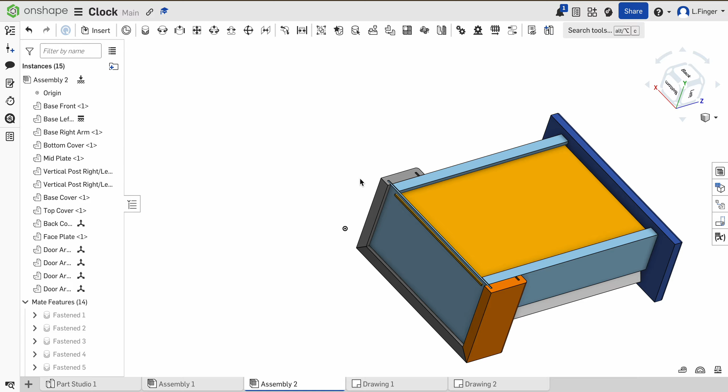Alright, here we go. This is the assembly tutorial for Onshape for our clock. We've already finished making all the parts and we're going to assemble it. There are a couple key things to remember: we need this back plate to slide, and we need the door to revolve or rotate. I'm going to show you how to do that, and then I'll show you how to turn it into a PDF and submit it for your points.

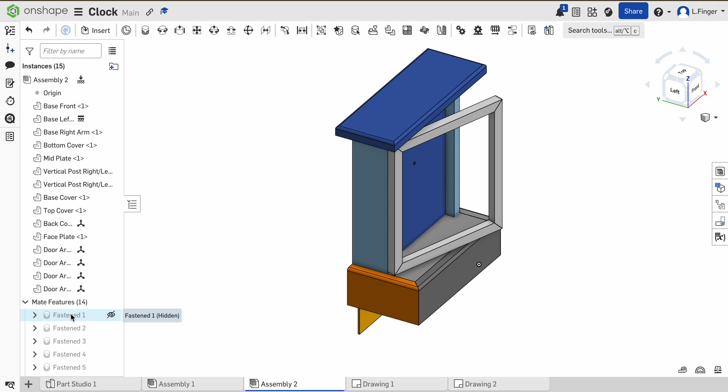Alright, let's go ahead and begin. I'm going to start with a new assembly. You should already have an assembly default made, but I'm going to create a new one. So here we go, assembly 3, a blank workspace.

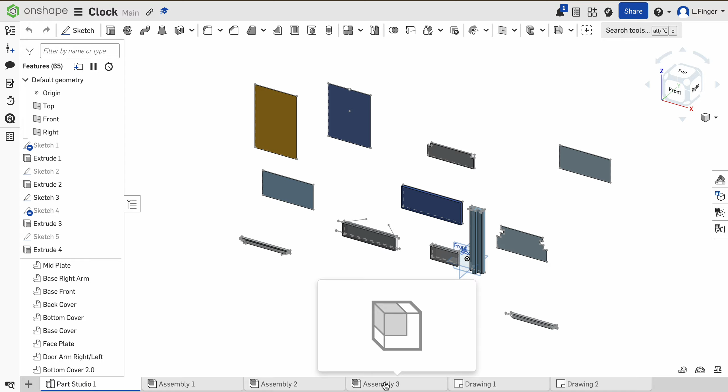What's nice about the assembly versus the part studio is that you're able to insert as many parts as you create, and you can fix them, fasten them together, and then they will stay that way, versus the part studio where we just made each piece. Now you could have multiple part studios, so you could have a part studio for every one component. Then you could have an assembly, multiple assembly files, and then assemble those together. But what I'm trying to get at is we're just going to build it all at once right now with all of the created parts based on the instructions on Canvas.

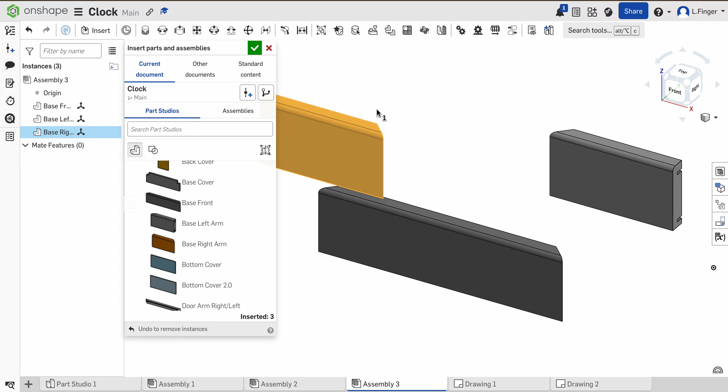So let's get into it. First step, assemble, insert. We're going to insert, let's start with our base front. So I click base front, bring it in, left arm, alright, let's put you there. Right arm, we'll put you there. Okay, a little slow. And then we're also going to do our mid plate.

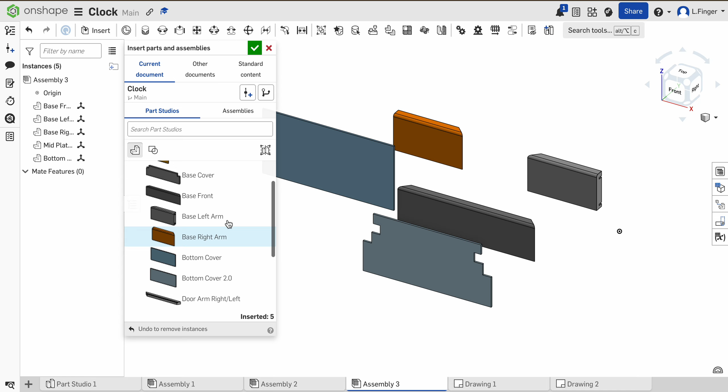There. And zoom out a little bit. After the mid plate, we're also going to need that bottom plate. So here's our bottom cover. I made a second one with a slightly different measurement, but I'll go ahead and use the original one. Let's see, that's probably good for now.

I mean, I'll put in the posts. I can always come back and insert more, but let's start with that. Hit OK, and there they are. They're in the assembly file. They're separate right now, but we're going to fix them together.

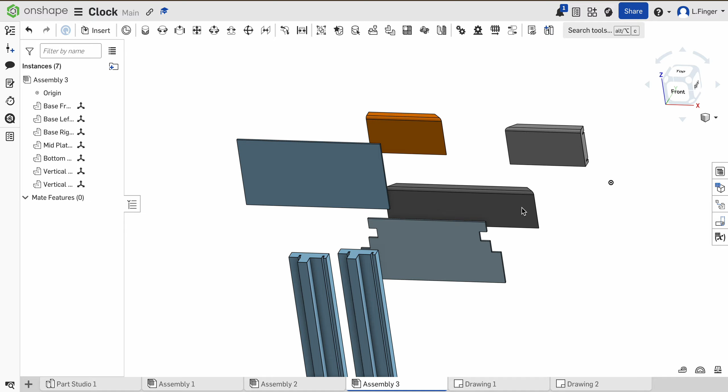So it's easiest to start with the base in this case. We're going to get the miters to line up. So here's one of the arms. This miter connects to this miter to create that 90-degree angle. Then we'll lock it in with these plates. Then we'll go with the posts.

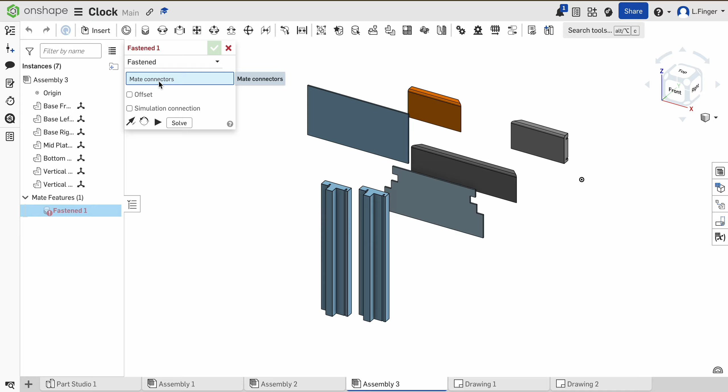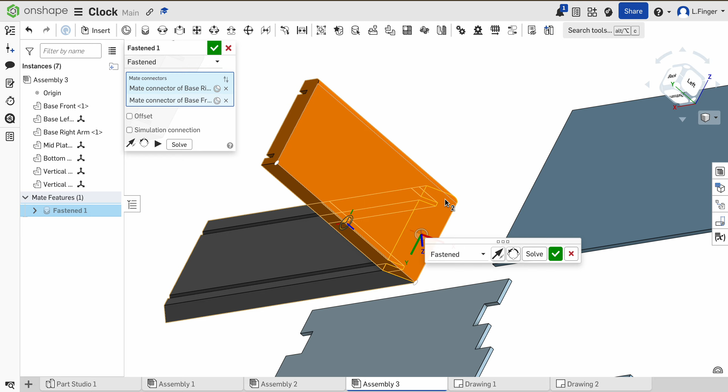So let's go ahead and click Fasten Mate. There's a couple different mates, M on your keyboard, but Fasten Mate is the one to use. Fasten. Now it's going to ask us to select two surfaces. Okay, first surface, let's just grab the very center here. It does allow you to grab edges and corners. I've noticed that if I grab this face right in the center and I click the next face right in the center...

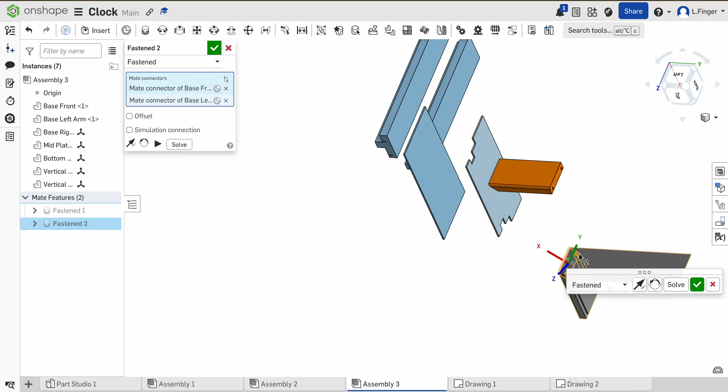...they should line up and get a nice tight miter. Okay, hit OK. I'm going to reset my view, and we're just going to do the next one. Here we go, grab this, zoom in, be real intentional from where you click. Okay, there we go, right in the center of that miter to the center of this miter, just like that. Now it moved everything just to show me what it could possibly look like. I'm going to go ahead and hit OK, and you can see that the whole assembly moved.

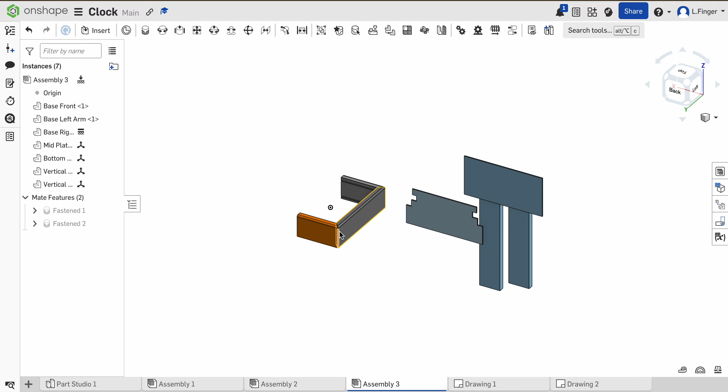This is still my origin. I don't want everything to move again on me. These are glued together, so what I'm going to do is just grab one of these pieces and fix it in place. So now everything will be moving to the base instead of the base moving to the object.

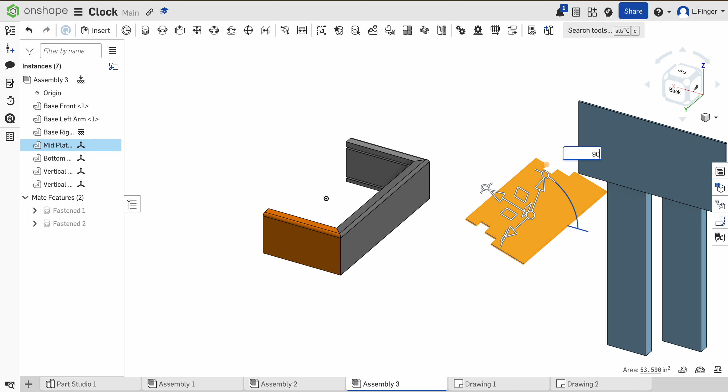Next step, we are going to grab our mid plate here, and I like to rotate it. I'll type in 90 here and rotate it the other direction, so it looks like it could just slide in. This just helps me assemble things when I can see how it's supposed to fit, and then I can use the correct mate after that.

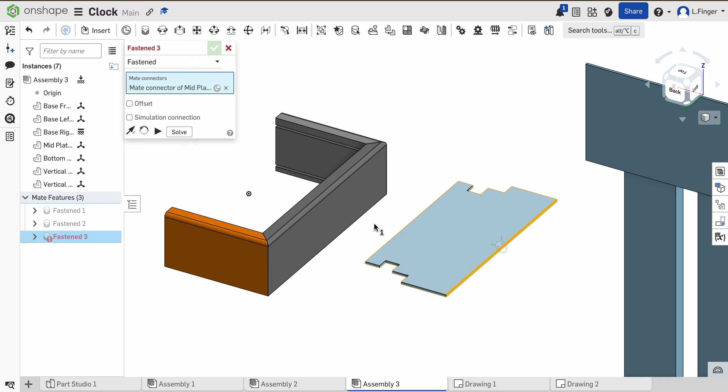Alright, so fasten mate, because we don't want this piece to move. I'm going to grab the top edge in this case. Now it's going to grab it right in the middle. There's my mate connector, and we're going to put it in the middle of our base in this groove.

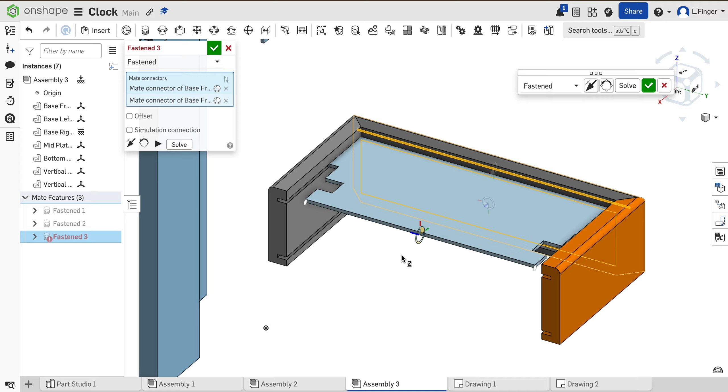Let's zoom out just a little bit. Two fingers, click, drag. See that corner in there? Top edge to top edge. Let's grab that. Before I hit OK, zoom out. Does it look correct? Yep, looks like it's in its groove. So we're going to hit OK.

Now we're going to do our next one. I'm going to hit X there, get out of my mate, grab this. You can drag it wherever you want. And like I said, I like to rotate it. So we need to rotate it this way and this way.

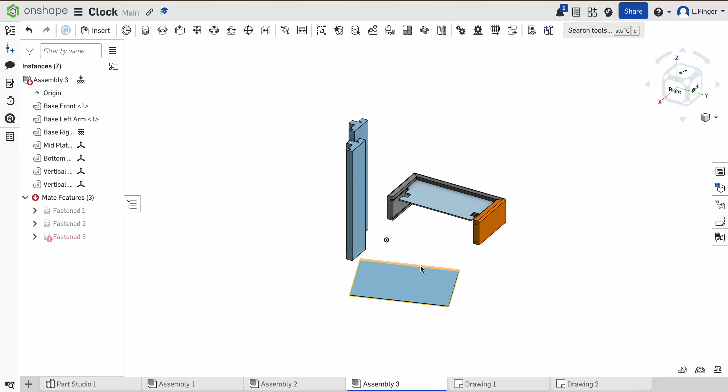Okay, that's how it's going to end up going in. So now I know what edge to grab. So fasten mate, top edge. Zoom in, let's grab this top edge in the back of the groove. Just like that. Good. Hit OK.

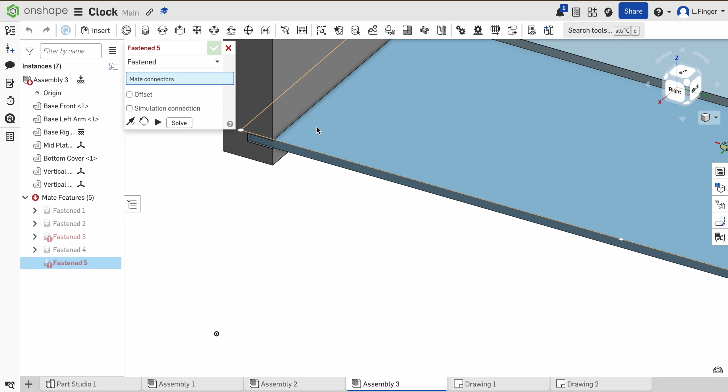Now, this bottom plate is the original size. I made a second one where it's a little bit shorter in width, so you can actually drop the back plate out of the clock and change the batteries. So we fixed that on the real project, not on the Onshape project, or the wood project. This is a real project too.

All right, let's get our posts done. Posts got to go in. The groove that is closer to the edge needs to go to the back. That's for that back plate to slide in and out of. This one, okay, so right here would need to be flipped.

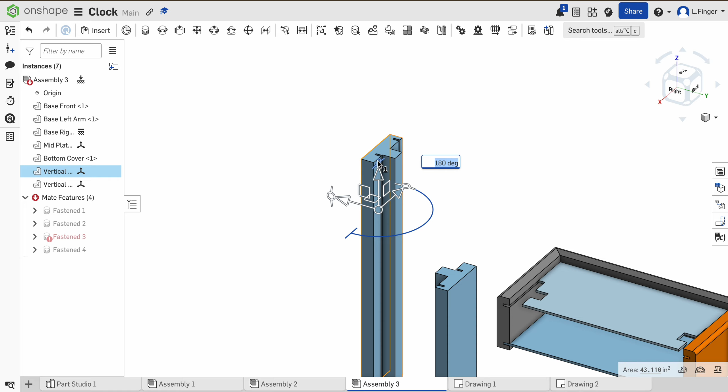So let's go ahead and flip it this direction. Okay, so let's see here. So it goes like that. Good. So 180. And then we're going to flip it the other direction. 180. And there it is. Back groove should line up with the next back groove.

Here's what I'm going to do now. I'm going to grab, you guessed it, fasten mate, and we're going to get the edge of this face flush with the edge of this face. And we need the bottom of the post to be on top of this board. There's multiple ways to assemble this, but I found that you could just grab this little corner here.

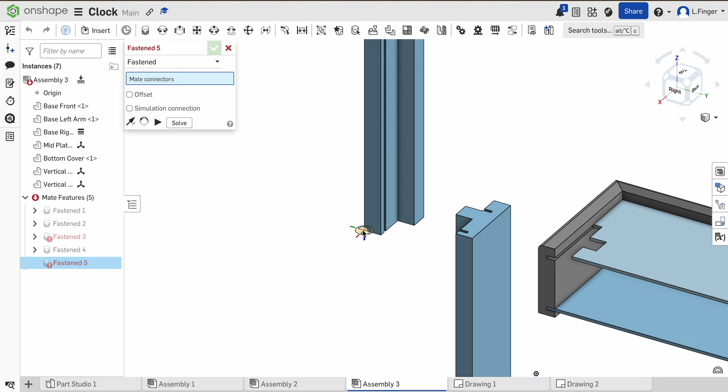Corner to corner. Right there. And it's going to fasten that corner together. Hit OK. That one's done.

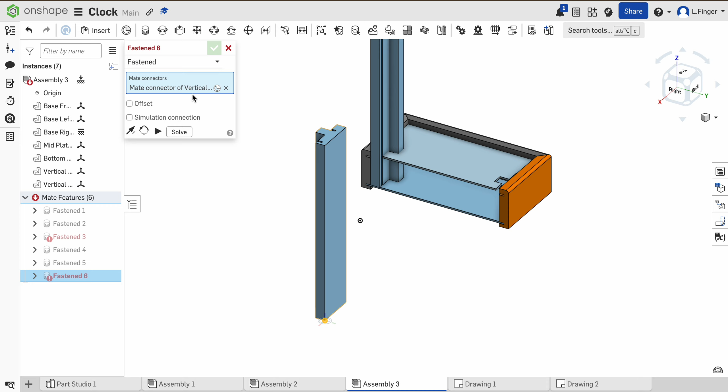Okay, zoom in again, let's grab the next one. Oh, I'm already in it. This corner. Okay, I got that mate on that right-left post to the base. Right, that corner. There it is. Hit OK.

See how the top plate has clearance for that groove? This bottom one does not. So we would have to cut that down.

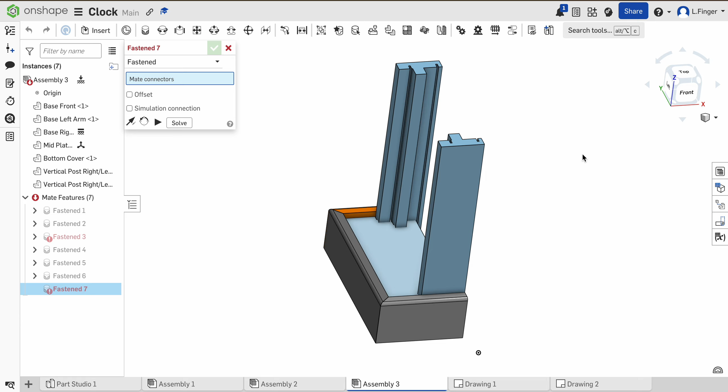All right, our posts are now assembled. What is next is to grab more components to insert. So we're going to insert more components. We might as well do the back cover. We'll do the base cover.

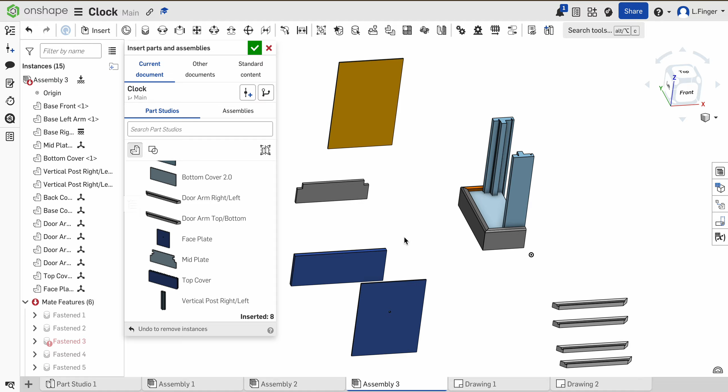Let's get the door, right and left arm in, the door top and bottom in. We'll get the top cover in, and we'll get the faceplate in, and that should be the rest of the components. All right, hit OK.

Let's start with our cover. This cover here, okay, I'm going to go ahead and just rotate it real fast. It's not like the rotates have to be perfect, but it's going to have to slide in sort of like so. That's going to help me determine what to grab.

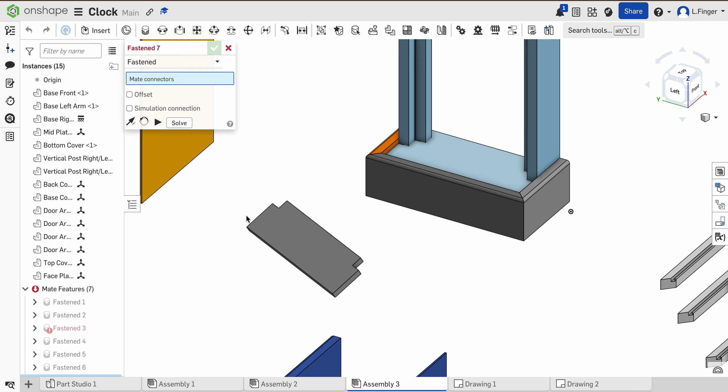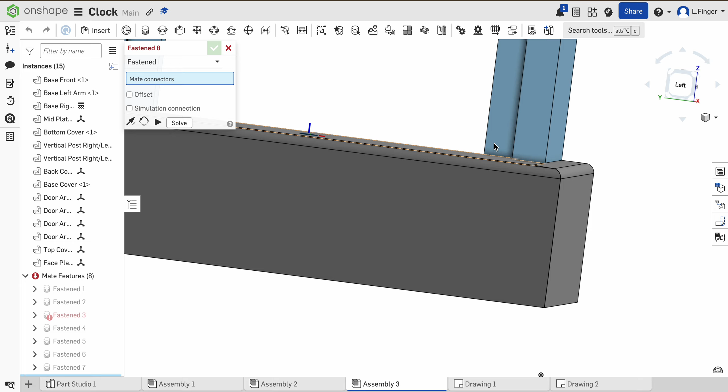I'm just going to grab this bottom edge right there, and we're going to fix it to this bottom edge right there. Okay, there it is, it's inserted. Nice tight fit. You can see that the top of the cover is flush with the base.

Zoom out. Time to do the next one. Let's do this faceplate. This faceplate is going to get locked in. You can see there's a hole for the clock mechanism. We're going to just grab an edge there. Now it's grabbing the middle.

I might need to change it up and grab a corner here. So let's hit X on that. If I grab this corner right there, okay, it's creating the mate connector. So I'm grabbing the corner.

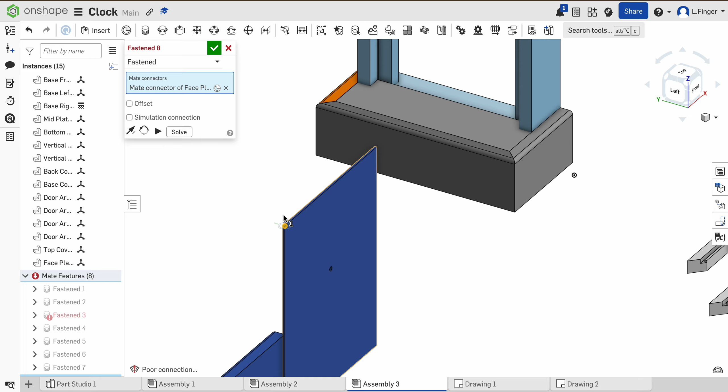Let's go ahead back to our clock, and we're going to stuff it right in the front against this corner. Now let's see if we did this right. I'm trying something a little new here. Corner to corner. All right, you can see that it is not in the position we think it should be. So let's rotate it.

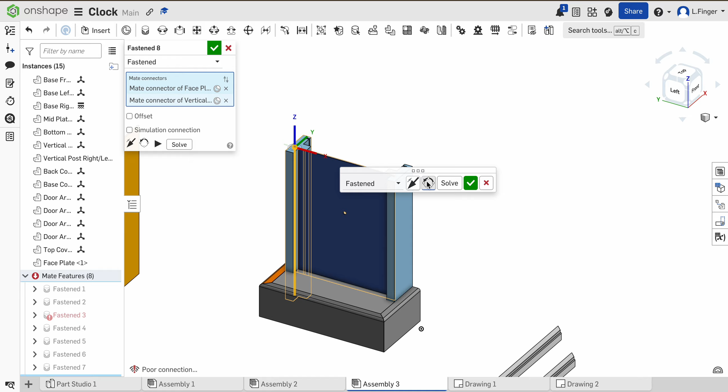Okay, if it's not in the groove, we'll have to flip it. So it looks like it is not in the groove. If we flip it and rotate it, oh, that's not going to look good either. So looks like I grabbed the wrong corner.

Now there's a way that we can kind of just fudge it. You see the X, Y, and the Z here. We can offset it, and currently it is off in the Y direction. So let's just type in -1. All right, -1 inch, that is way too much. We need this plate to be in the groove. How about 0.1?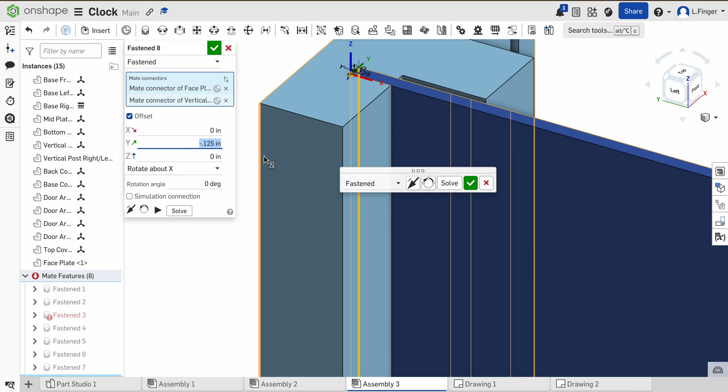Close, there's still a little bit of interference there. 0.125, there it is, the width of the bit. It fits. So there's the front plate.

The next plate is going to have to go in the back. Now this plate is the one that needs to slide, so we're going to use our different type of fasten. Slider mate - slider mate allows the component to slide on the mate connectors you select. So we want to slide up and down the groove.

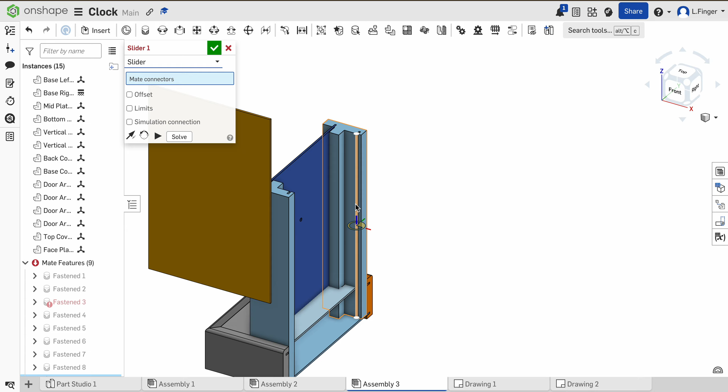Well, that would mean it's going to slide on this edge. So let's grab the edge. Did I get it? Yep, mate connector of back cover. Let's throw it in the groove. Now I grabbed that back corner.

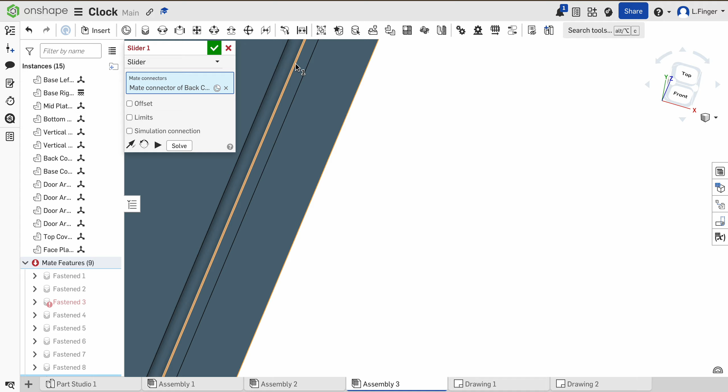So let's think about this. I think it has to go into this back corner. Right there, zoom out - is it in the correct spot? I don't think so. Let's go ahead and rotate. That's better. Hit OK, and let's give her a test.

So looking at our instances over here, these are all of our parts. Here's our mate features. Slider - let's go ahead and hit X. We got our slider 1. It should slide up and down the groove. Okay, let's keep that flush on the top.

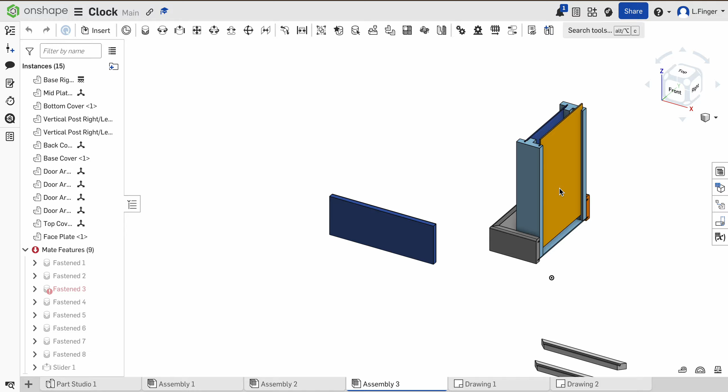We're going to add our next one, the top cover. This component here should have a round over. The round over needs to be facing up. Let's go ahead and grab it, click it, drag it, rotate it, flip it over. Good enough.

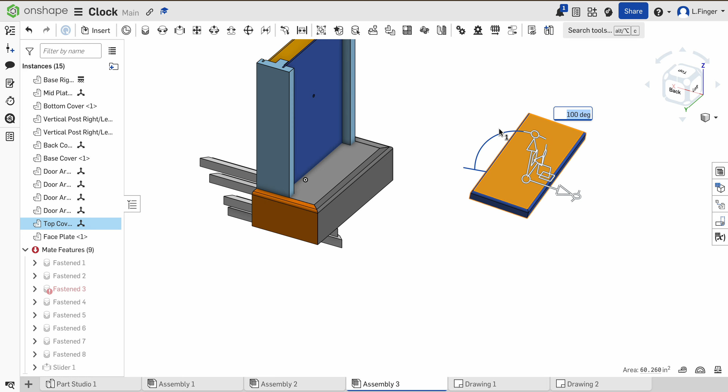Okay, now I have it rounded on all sides. It is actually an aesthetic choice that you guys can make on what you want to round. Doesn't have to be round over, doesn't have to be every side. But when I go to put this on, we're going to use fasten mate, as we don't want this component removable. We can grab any edge we really want.

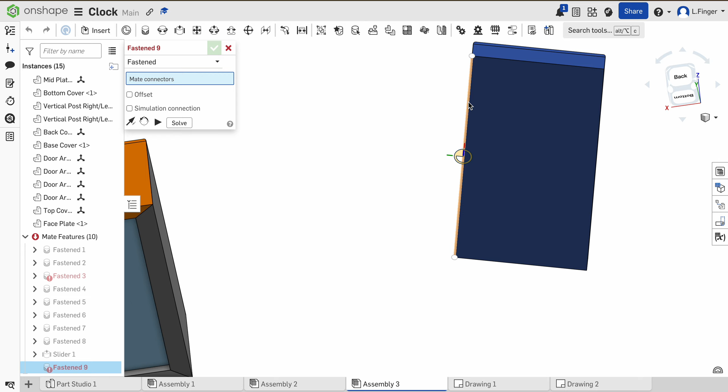I'm just going to grab this back edge - okay, the bottom corner edge. Zoom out, bring it on over, and I'm just going to select this edge right there. Now you can see it is not mounted in the spot we like.

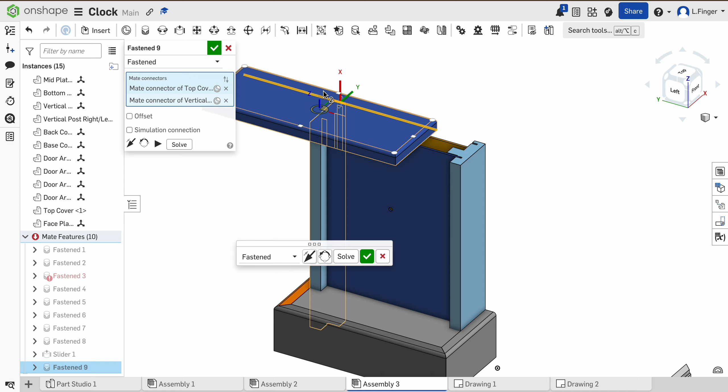We're going to use the offset tool to correct it. So there's our Z, X, Y. We're going to have to go -Z and +Y. So let's start with offset. Type in -3, okay, not enough. I'm looking for kind of symmetry here. -4, no, -5, that's looking pretty good.

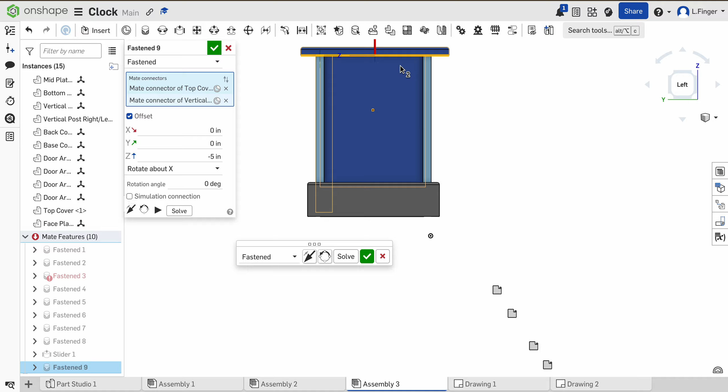You can see that it's a little off, so we could pause this for a minute. Oh, don't hit escape, that's going to cancel everything. Let's go ahead and refasten it.

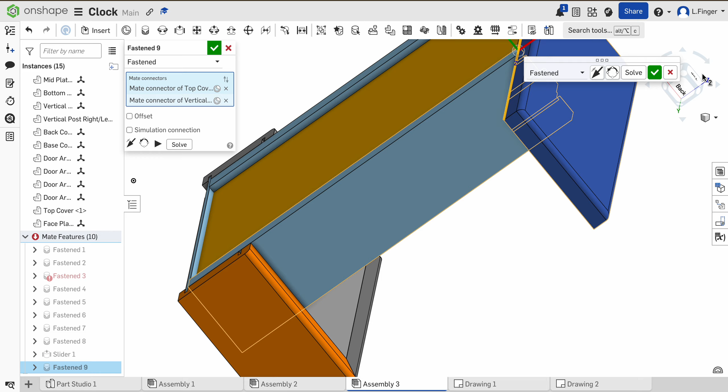Back edge to this back edge. Zoom out. Okay, offset, still negative Z in this case, negative 4.5. Hit left, see how the cap is slightly off? I'm gonna hit OK, we're gonna save it, we're gonna fix it.

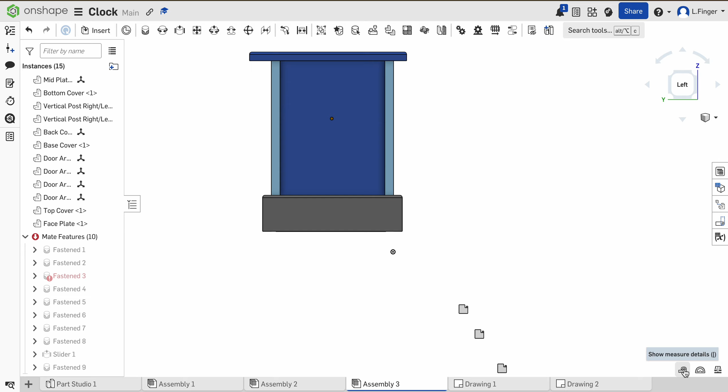There should be a measurement tool in here to figure out these parts. So if you hit X out of the mate connectors, here is some measurement tools, and you should be able to grab this edge, this face, to this edge, and the distance happens to be - let's see here - looks like we're going to go off of the green one there. It looks to be from one face to the other face.

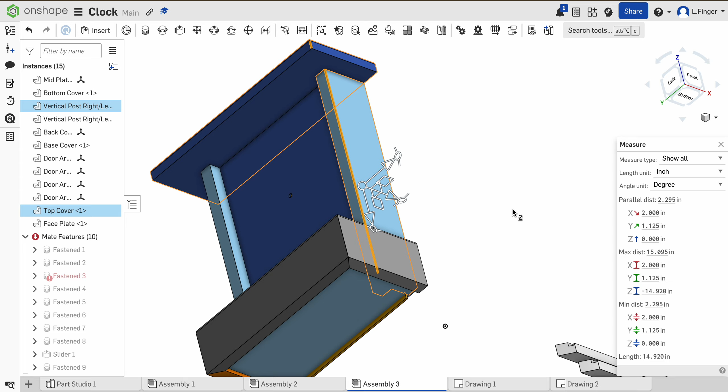1.125. Alright, if we click back off here, and we're going to click this face to this face, this one happens to be negative 1.875. So we could subtract those and meet in the middle. So we're going to have to move over just a little bit more. We could add those up and then divide them. So I'm just going to do a quick math here.

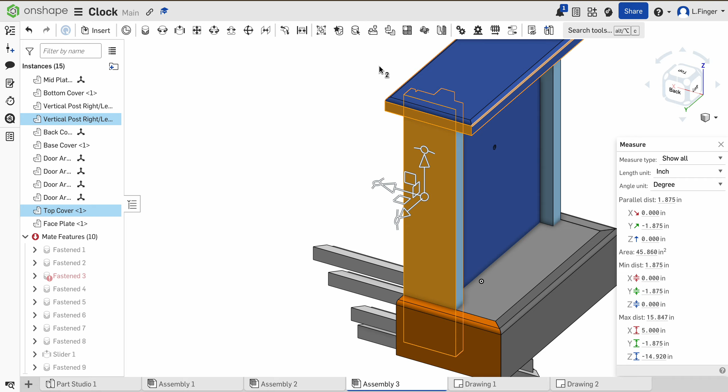So 0.625 divided by 2, let's see here. Scroll back down into our mate connectors. Let's go ahead and hit fasten.

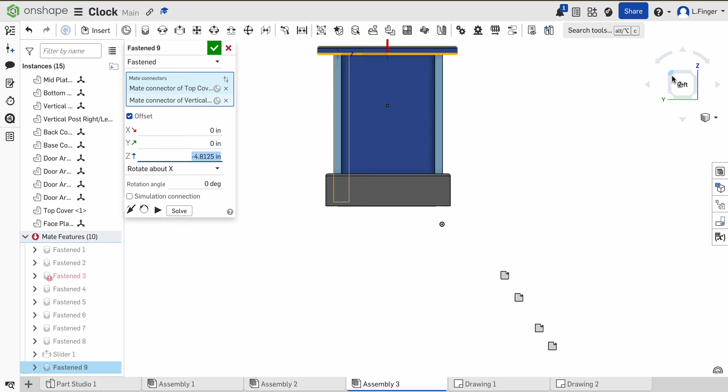And we're going to have to add a little bit here. So we're going to add 0.3125. Hit OK. And split the difference. So now it looks perfectly in the center. Now the next step's up to you. If you think it doesn't look good completely flush to the back, you could send the Y direction maybe a ½ inch and give it a little lip on the back. Okay. There it is. That's the cap using the offset feature.

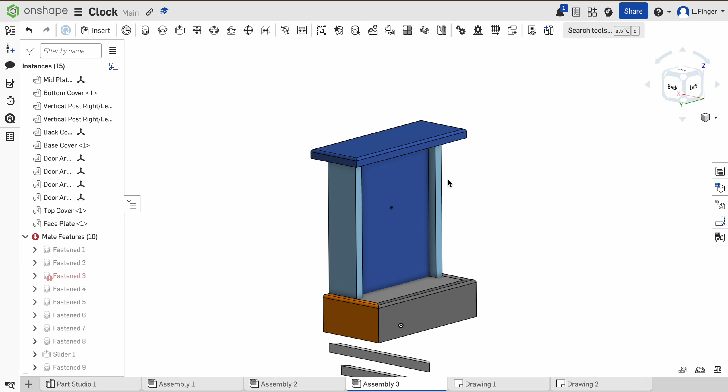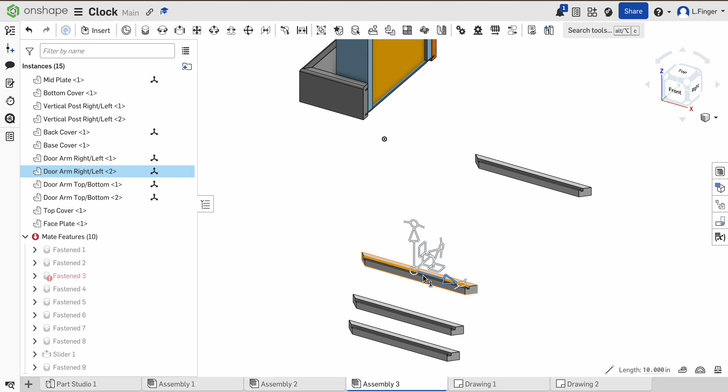The next step is to build the door. And then with the door, we're going to want it to revolve. So let's go ahead and assemble it. Now, when I did this in class, I ended up gluing the right arm to the left arm, which shouldn't be the case. It has to go every other. So this is door arm left right, so that's going to have to go about here. Let's go ahead and rotate it.

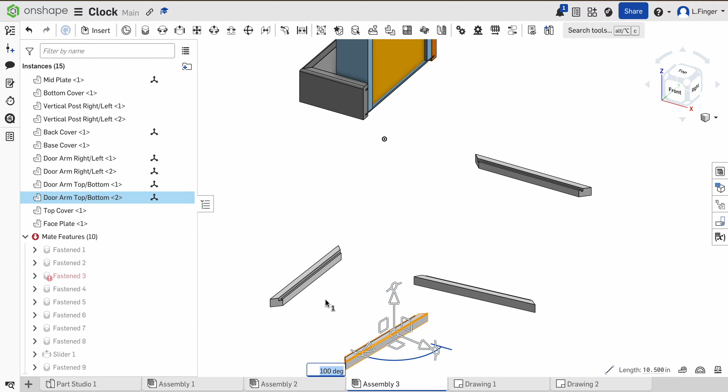This arm needs to be in between, so let's go ahead and rotate this one like so, and this last one needs to rotate the other way. Each one of these arms has a groove, a little slot there. That's for the glass pane to sit. This square stock here is going to be glued on after the fact to hold in that glass pane. This needs to face in on the clock so you don't see it. Alright, let's go ahead and assemble these.

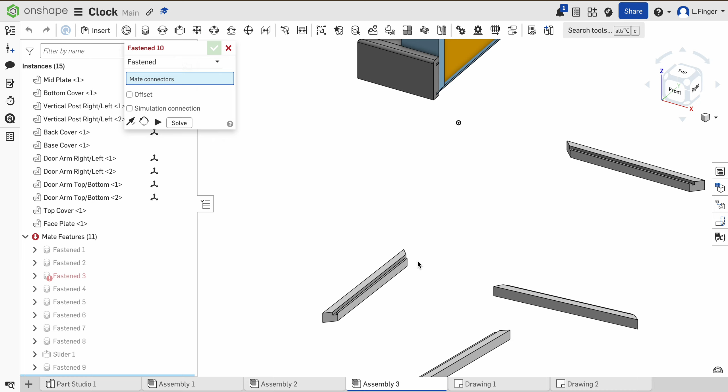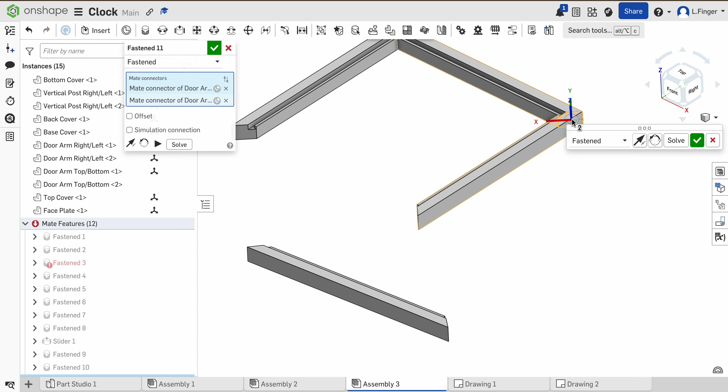Mate connector. We are going to grab this face, just like we were doing our miters earlier, right in the center. We're going to glue center to center. Do our grooves line up? Yes, they do. Let's hit OK. Okay, reset our view. Next one is this guy. This face to this face. Go ahead and hit OK. Lastly, this face to this face. Just like so. Hit OK.

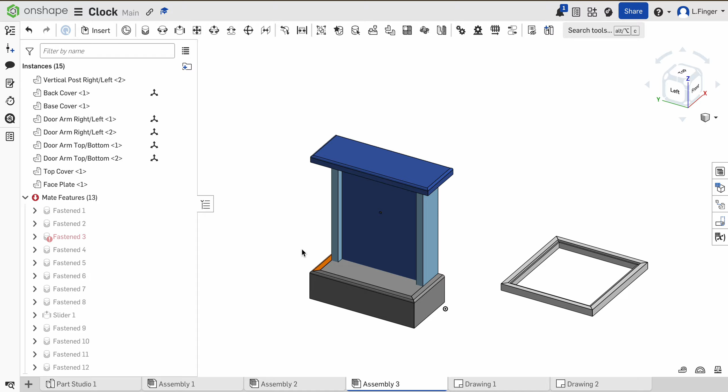Now we got our frame done. It is all fastened together. It should move as one unit, just like our clock. Well, never mind, it won't move. We fixed it. The slider will move, because that's not fixed. We put a slider constraint on it. We're going to get our door to rotate. So start off with rotating your door.

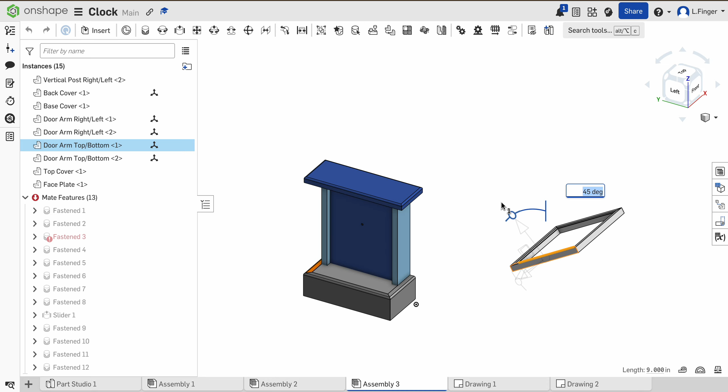We got to figure out which way it goes on, as this door is not a perfect square, it's a rectangle. So let's rotate it this direction, stand it up on end, 90. Let's flip it around, also 90. Okay, and hit left here. Will this door fit just perfectly? All right, you can see there's quite a big gap on the top and bottom, and as I slide the door over, looks like it peeks out both sides.

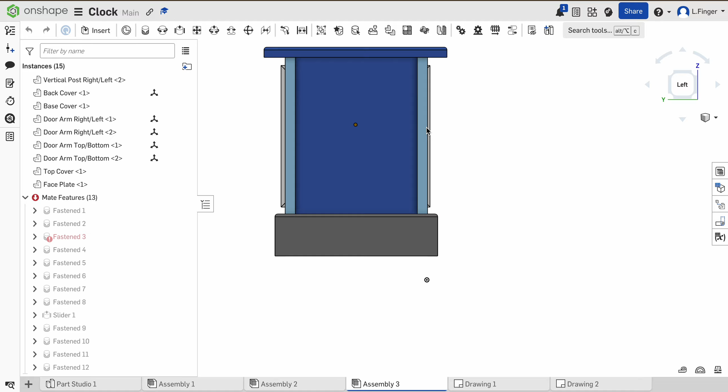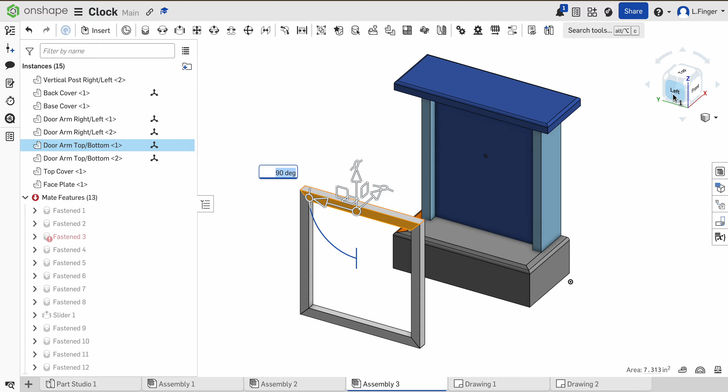I should really actually just bring this frame forward. Right there. So let's see which way it looks better. Does it look better this way? Or does it look better the other way? Let's go ahead and rotate it 90 degrees. And it's probably going to look better this way. Pretty much flush on the edges of the clock posts.

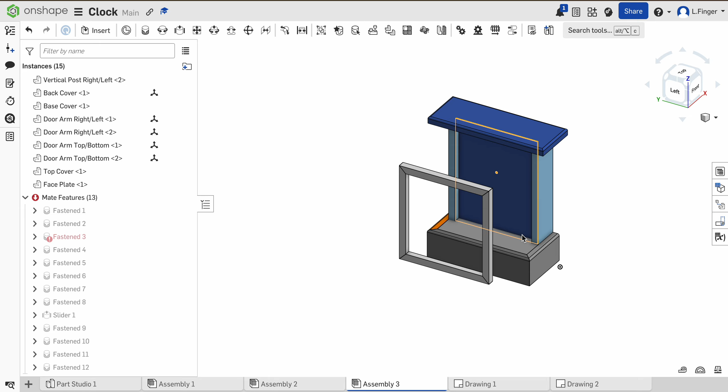And you want a little bit of room between the top cap and the base. You don't want the frame to be rubbing on either of those surfaces. You're going to have to float it when you install the hinges. It could scratch the finish and get wedged in there. It just won't work very well. So our final assembly step before we make the file to submit the project, we're going to use Revolute. This is going to allow rotation between two edges you selected.

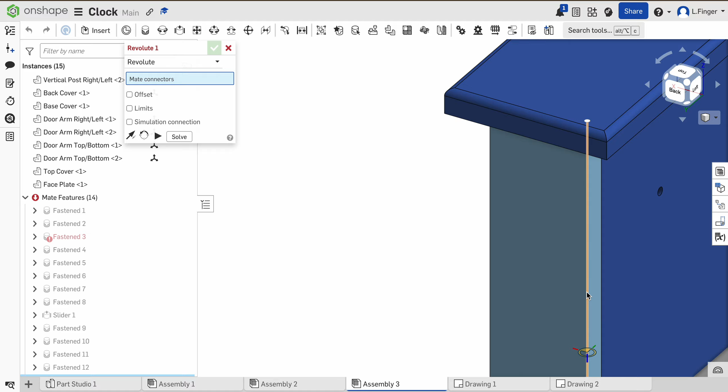So go ahead and we're going to grab this post edge here. I prefer it mounting here. If you want your clock to open up the other way, that's fine. And we're going to grab this edge. So back edge to back edge. That's kind of where the hinges are roughly going to mount. And we're going to select it. Notice how only one of these posts moved. Should be okay. All of these should transfer with it.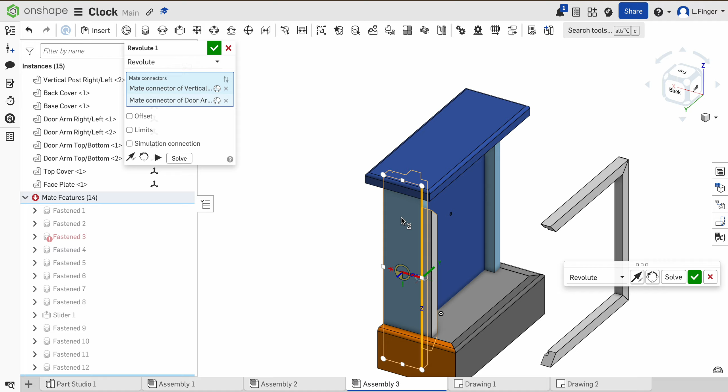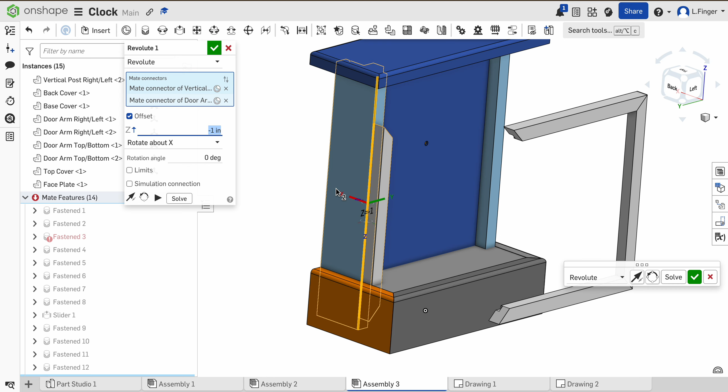Now notice a little bit of interference there. Okay, that's not possible. Let's offset it. We're just going to offset the Z in this case. Looks like we need to go negative Z. Negative Z, bringing this frame back up 1 inch. Oh, I must have got that wrong. Why did it go down? -2. Yep, it's only going further down. Let's go the other direction.

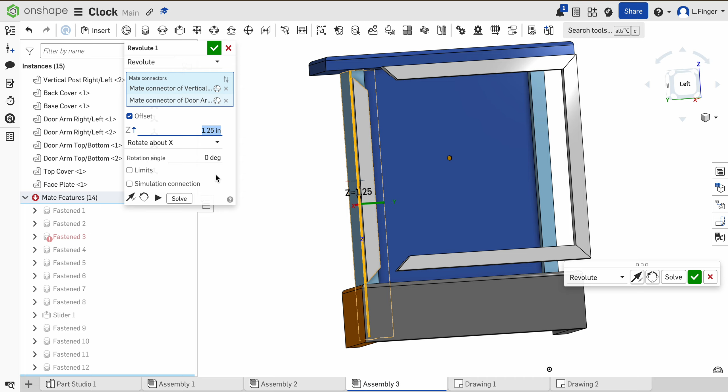3 inches. Oh, way too tall. 2 inches. Too tall. 1 inch. It's a little bit of guess and check. Again, you can always just get out the measuring tool and get it exact. But let's do 1.25. Okay. That looks pretty good. Let's go 1.4. There it is. I think that's going to suffice. Hit OK. There we go.

The rest of the frame goes with it. Reset our view. Click and drag. Open and close. And that's it. The clock Onshape assembly is now done.